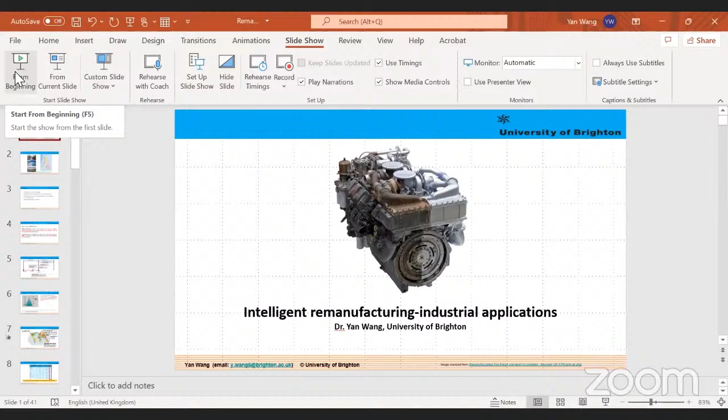Yes, it's visible. Excellent. So today's topic, we'll talk about intelligent remanufacturing, which is focused on industrial applications.

We also have history, a lot of art shops here. So it's a very popular area in Brighton for English people to come to visit. It is a tourist attraction area as well. So I do hope you could come to visit me in Brighton, not only for remanufacturing, but also for the culture and the history as well.

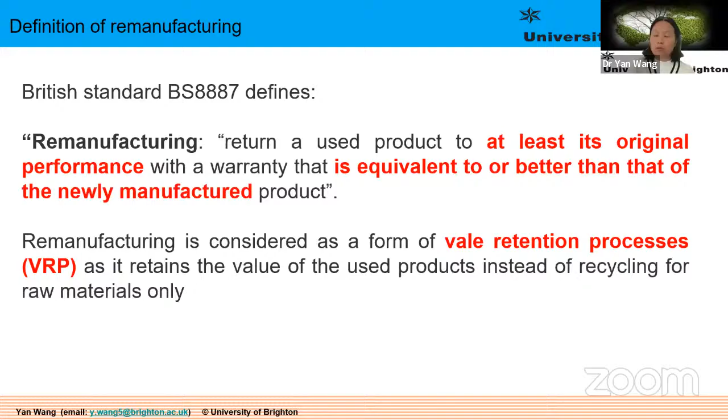There is a lot of confusion between remanufacturing and other similar terms, for example refurbishment, reuse, or repair. I would like to use this diagram to show the difference.

The first one is repair. Normally repair is within the first life and it doesn't change the ownership. Remanufacturing would expect the same amount of life compared to the previous life. But refurbishment is a bit lower form of remanufacturing—it does return an end-of-life product back to life again, but doesn't guarantee the same amount of service life. Direct reuse is just like selling a product on eBay—somebody else wants to use it, or you do some simple cleaning and reuse it again.

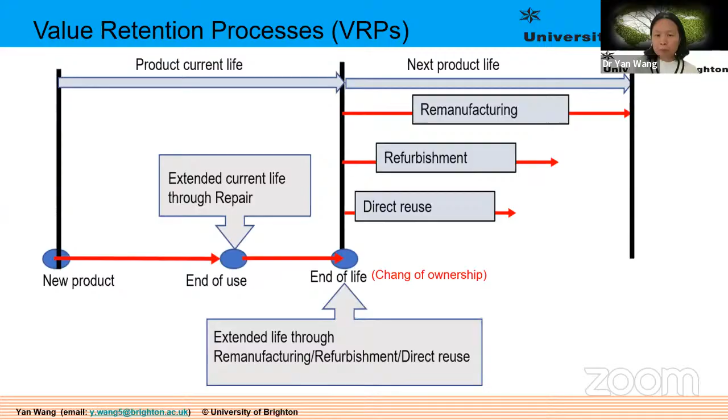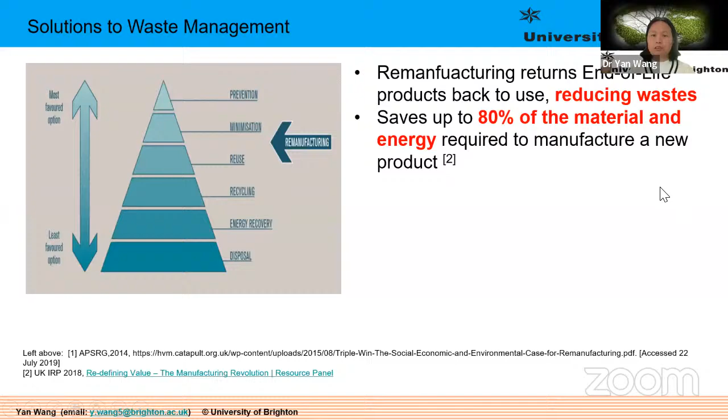So it's not the same level as remanufacturing. Remanufacturing is the highest level for reuse. If you look at the waste hierarchy, remanufacturing is at a very high level compared to reuse, and recycling is definitely much higher level compared to energy recovery. It also reduces waste, and you can save up to 80% of materials and energy compared to making a new product.

If you look globally, the largest market for remanufacturing is in the US. The second is the EU, and within the EU, Germany has the most remanufacturing, followed by the UK, France, and Italy. Outside the US or EU, the next area is Asia. Asia is one of the biggest and fastest growing areas, with China being a major player in that region.

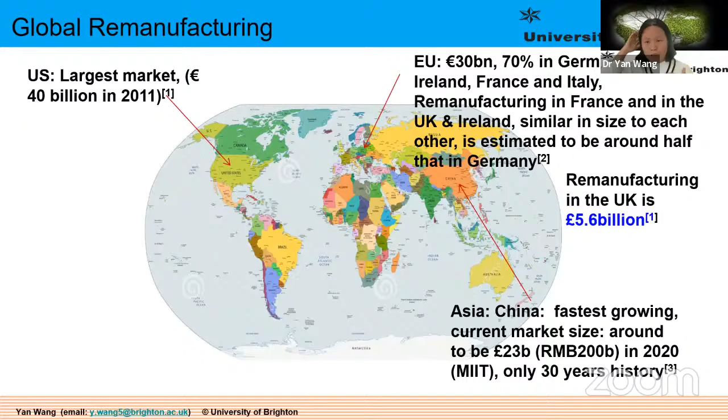If you look at the sector distribution, the biggest area is really aerospace, followed by automotive, then heavy-duty off-road machinery, then others such as furniture repair or industrial medical equipment. That is the distribution.

However, if you look at the intensity, defined as the ratio of remanufacturing to manufacturing, actually remanufacturing is very, very low—only 1.9% of virgin manufacturing. So there's a lot of work to be done. I'm not surprised if somebody says they've never heard of remanufacturing, because this sector is so underrepresented and not widely recognized as an existing industry. There's a lot of activity in the background, but a lot of people don't know about it.

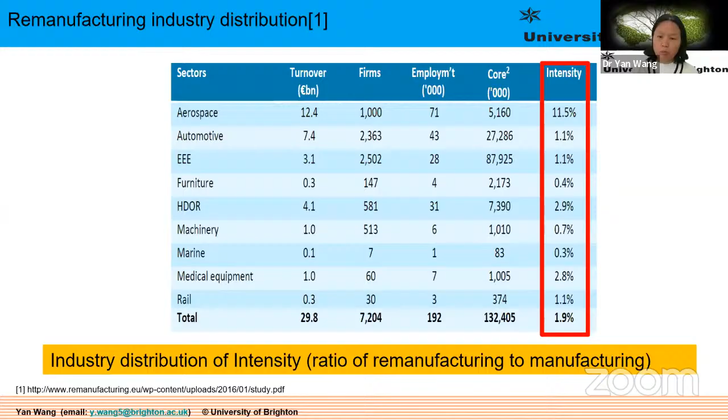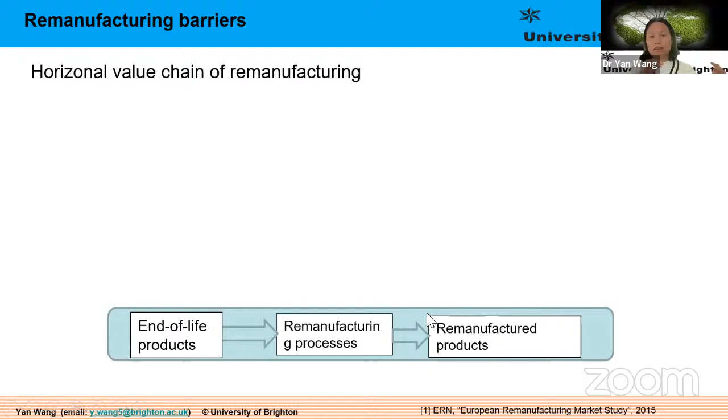Having talked about remanufacturing, I would like to talk about the challenge for remanufacturing. If you look at the remanufacturing process, you start from end of life product - that is the feedstock for remanufacturing. Then they go through the remanufacturing process: disassembly, cleaning, inspection, repair, reassembly, and then repackage. Then they deliver to the customer again and become remanufactured product.

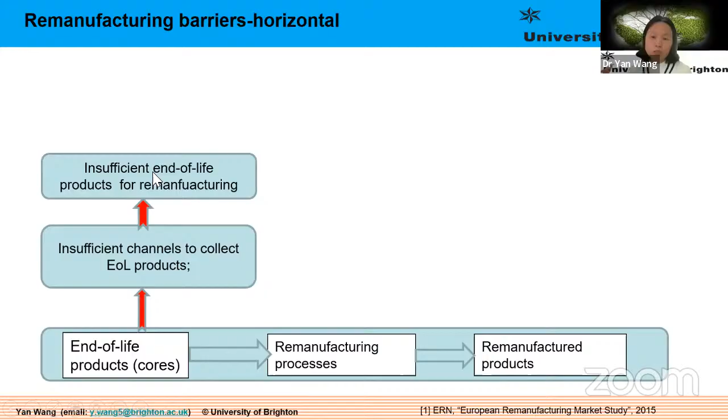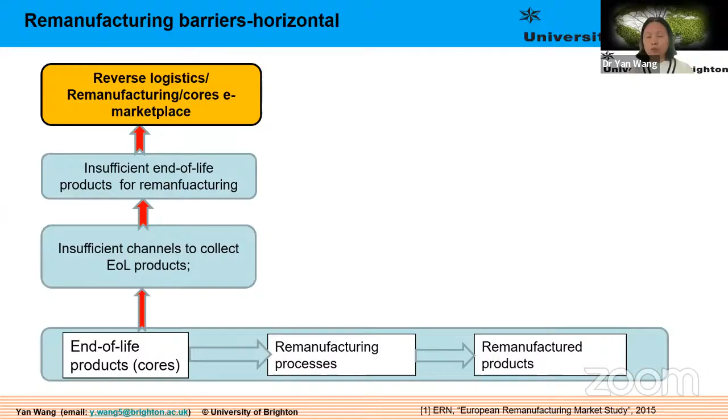If you're looking at this horizontal value chain for remanufacturing, there are a lot of potential issues. The biggest problem for remanufacturers is they don't have enough channels to collect end-of-life product. As a result, they don't have enough product to organize remanufacturing. If we could work on the research, we could work on reverse logistics or look at an e-marketplace, like Amazon for remanufacturing, to collect used products.

If you look at the remanufacturing process, the biggest issue is uncertainty, because the feedstock for remanufacturing is end-of-life product, and you don't know when a product is going to fail, and you don't know how many are going to arrive for remanufacturing. That makes it extremely difficult for the remanufacturing process, because the company has to organize resources without knowing how many products will arrive and how to organize resources to deal with this.

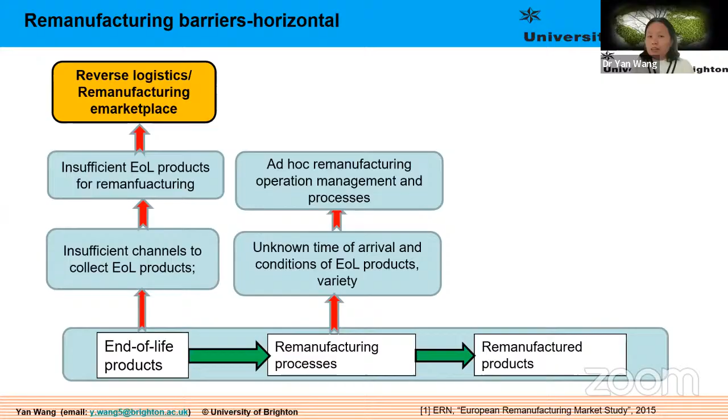As a result, remanufacturing is really ad hoc - they can't plan at once. So you cannot have the same amount of efficiency as manufacturing. The remanufacturing efficiency is only one-third of that compared to manufacturing. Therefore, there is a lot of research needed to make the remanufacturing process agile and efficient.

Looking at when the product is remanufactured, there are also a lot of issues. For example, a lot of people don't know there is remanufactured product - they don't understand remanufactured product exists, and they feel remanufactured product is kind of second-hand, so they don't trust the quality of remanufactured product.

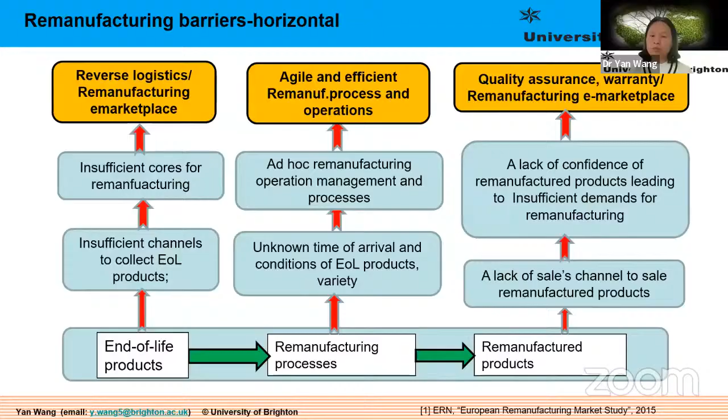They also have no confidence in remanufactured product, and that tells us there is a need for research to get quality assurance, to look at the warranty, as well as accreditation. When somebody claims my product is as good as new, how do you know he does the job? There will need to be quality assurance as well as an accreditation process for the remanufactured product. Another problem is there's a lack of sales channel for remanufactured product - we need an e-marketplace for remanufactured product, similar to Amazon for new products.

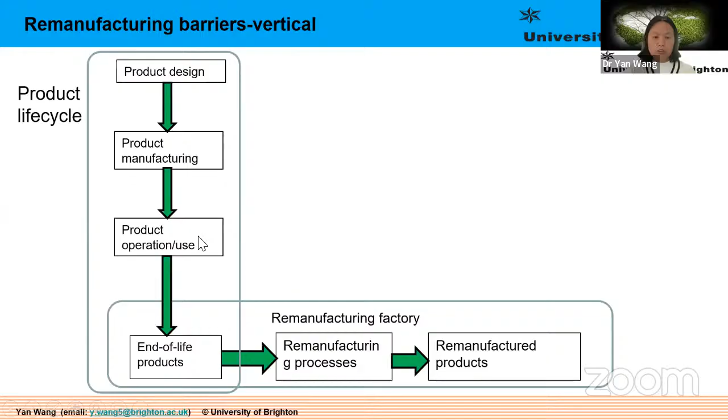If I want to look vertically at the product life cycle, remanufacturing starts at the end of the first life, and this is the starting point of the second life. So the first life will definitely affect how the product is processed and used in the second life. Looking at the first life, a product experiences design, manufacturing, operation, use, and then end of life. For each of these stages, there are their own problems.

The big challenge is that products are not designed for remanufacturing. They are designed to reduce cost, designed for mass production, but not designed for remanufacturing. As a result, the product is very difficult to disassemble - if you want to disassemble it, most of the time you just have to break it or destroy it. So they're not designed to be remanufactured. A typical example is probably Apple phones or Apple computers.

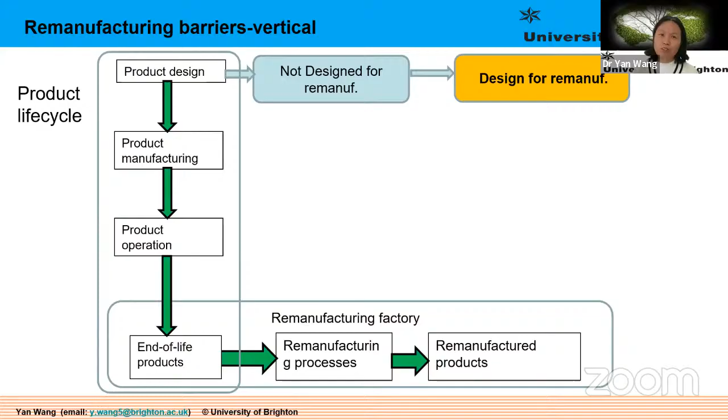The next issue is that when you're doing manufacturing and operation, the data is not shared with remanufacturing, because the business model for remanufacturing is often subcontracted - they're not integrated into the product life cycle. So the OEM has all the information for the design and manufacturing, and the user has information about how it's being used, but this information is not passed to the remanufacturer. So the remanufacturer has no idea what has been done to this product in its previous life. Therefore, they cannot make an informed decision about what they can do in the process, or whether a product is reusable for a second life.

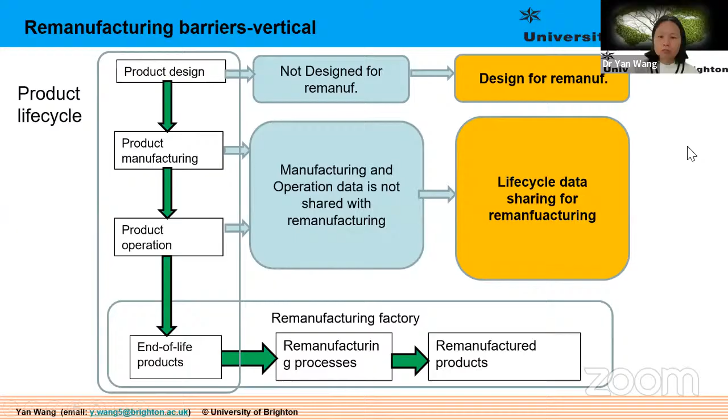So that is a very big issue for them. In addition to the horizontal supply chain level, production level, or the vertical level in the life cycle, there are a lot of non-technical issues.

For example, the legislation. In the EU, a lot of end-of-life products are treated as waste. If they're treated as waste, they have a lot of limitations on what you can do for a product.

The second one is about trade. There are a lot of limitations on what you can do for the end-of-life product. If you want to import, export, or remanufacture it, you might have to import the end-of-life product, remanufacture it, and then export it again to be used. But a lot of countries have limits on the trade of remanufactured or end-of-life products because they're treated as waste.

They also have a problem with standardization and accreditation. As I'm a committee member for the standard, we are developing some standards for the BSI, but the standards are very, very limited.

There's also a lack of awareness and trust, because, as you said, you only knew about remanufacturing 6 months ago, and a lot of people probably don't know about remanufacturing until now. So there's confusion between remanufacturing and refurbishment, which affects awareness and trust of remanufactured products, because people think it's the same as refurbishment and don't trust the quality of remanufacturing.

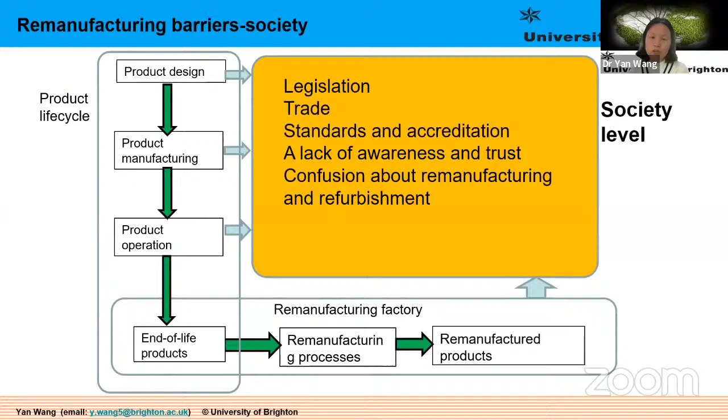So this is just giving you a summary of the problems with remanufacturing. We also conducted a national survey of remanufacturers to get first-hand information on what exactly the problem is for them. This is a survey we did last year with some other partners about the barriers facing remanufacturers, and it was participated in by 20 plus companies.

And what they told me, coming directly from companies, is that the biggest problem for them is user behavior or perception of remanufacturing as second hand.

The second big issue is technical data from the OEM, because the original manufacturer doesn't share the data on how the product is made, what materials are used, and what manufacturing specifications they have for the first life. This information is not passed on to the remanufacturer, so they have to do it from scratch.

Then the next one is legislation and certification, which is what we mentioned about remanufacturing, where the end-of-life product is treated as waste rather than an asset available to be used again.

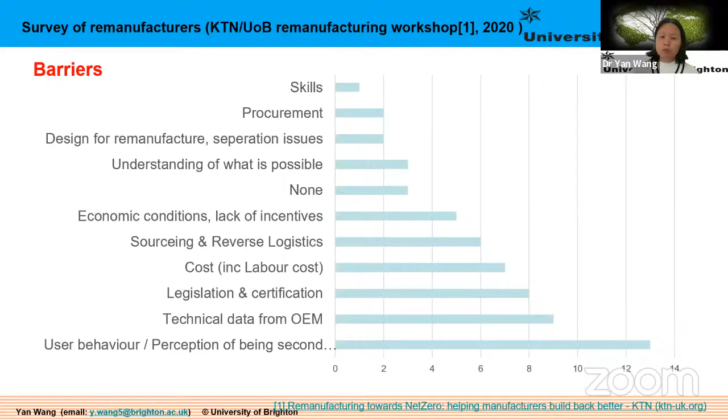If you look at all these challenges, then okay, why are people still doing it? There are also a lot of opportunities for remanufacturing, the drivers for remanufacturing. So again, we did a survey.

We surveyed about 25 remanufacturers, asking them what the biggest driver they would consider for remanufacturing is, and the majority of them said sustainability, material efficiency, and circularity. This is the biggest driver, especially in the UK.

Net zero is part of the legislation, and companies have to do much more now compared to before for net zero and reducing carbon emissions. Remanufacturing offers an alternative for them to reduce carbon emissions, so that attracts a lot of attention at this moment.

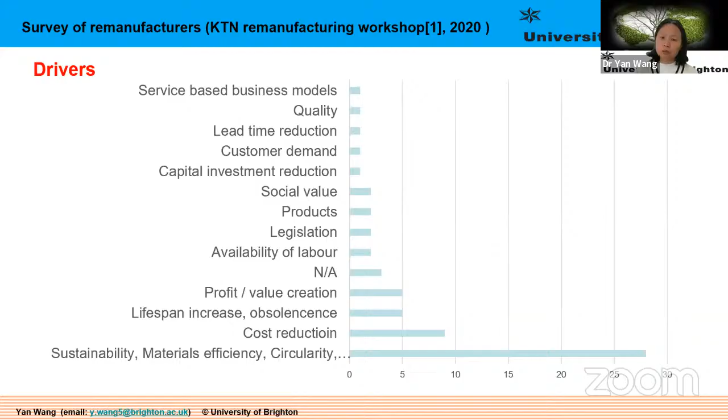And the EU legislation, the right to repair, has forced OEMs and designers to think about what products are going to be and make them repairable at end of life, and that will help with this design for VRP.

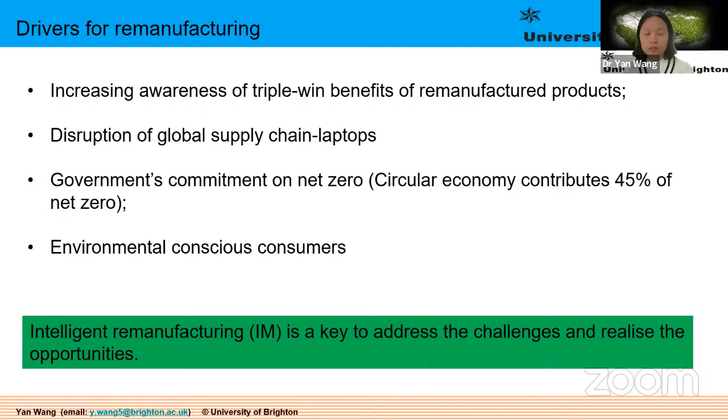So in all of this, to address the challenges and deliver the benefits of remanufacturing, and realize its opportunities, intelligent remanufacturing is key to addressing these challenges. So now, we've talked about the problems with remanufacturing, we've explained the opportunities, but the next question is: what is the solution? What do you mean by intelligent remanufacturing?

I think you're very familiar with the pillars of intelligent manufacturing, but to me, I would like to say the focus of intelligent remanufacturing should be on three areas for remanufacturing.

First is life cycle data integration. We need to develop a mechanism, business model, or method to be able to access data from the first life for remanufacturing, for example design data, manufacturing data, operation use data, and maintenance data. They need to be passed on, there should be some mechanism to pass this on to the remanufacturer for them to use. Based on this data, the remanufacturer can decide how they're going to do the remanufacturing and whether or not an end-of-life product is worth remanufacturing.

Also, you're probably very familiar with predictive maintenance, they should have the same level of work for predictive remanufacturing, so we can know when a product should be remanufactured rather than only looking at when a product should be maintained. That's a key area intelligent remanufacturing should be looking at.

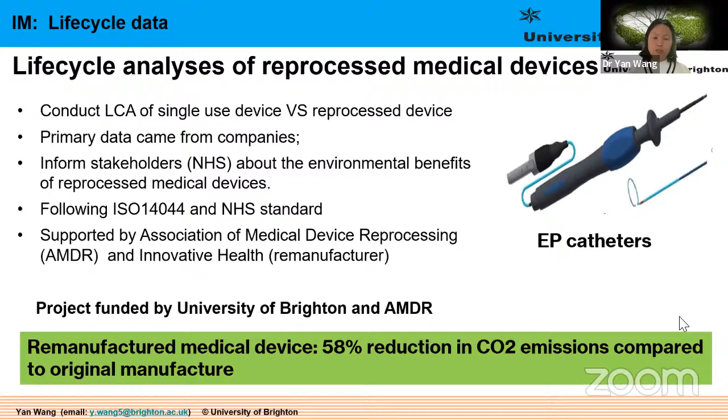So after we talk about life cycle analysis, we also worked on the intelligent factory, and for this case study, we're using the rolling stock, talking about flexible restoration, how we repair end of life defective product for rolling stock components.

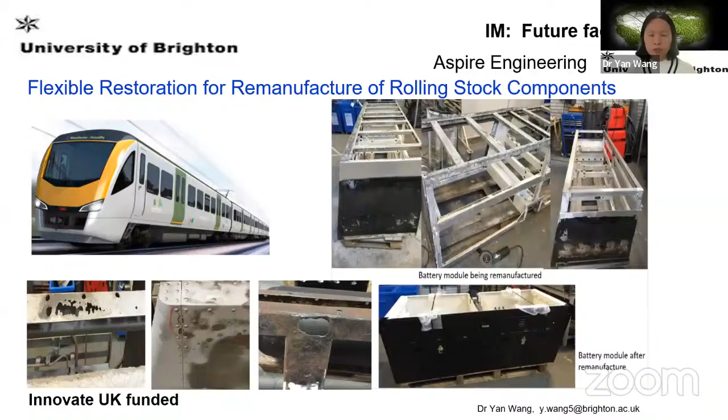As you can see, components like that are retired at the overhaul process. Each of them is individual, so they have to be repaired individually. At this moment, this has been done manually. We are looking at whether we can do something more flexible, adaptive, and then make them automated.

So what we did is we developed a hybrid process, adaptive robotics remanufacturing. We take an end-of-life defective product and use 3D scanning to reconstruct the digital model of the product. We develop an algorithm to compare this defective component with the original component, to calculate where the defect is. Based on the defect, we create the tool paths to repair the material deposit, the missing materials, and then we do the subsequent machining to machine them back so you get a smooth surface. So that is the overall framework.

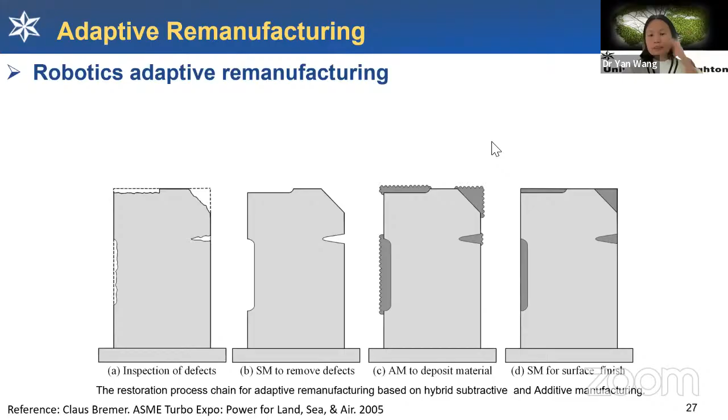The real research question, the very big challenge, is if each component is individual, how do I identify what kind of failure it is? It could be failed by corrosion, it could be failed by crack, it could be failed by fracture, for example. How do I know which failure it is? I need to identify it accurately and quickly for remanufacturing.

Second, how could I generate a repair strategy for a robot to do the repair according to the identified failure feature? So which repair parameters should I use, what is the tool path, the movement of the cutter, the welding deposition for the repair of the defect area, and what is the tool path for the subsequent machining, because I want them to be automated. So what can I do with that?

So to do that, the first step is to identify the failure. As we said, what we did is use 3D scanning to scan the defective model, and compare it with the nominal model using an algorithm we developed. We cut them into layers and compare each layer to find the difference between them, which allows us to extract the point cloud of the damaged regions. That is extremely useful for us, because with this point cloud of the damaged region, we can calculate where the failure location is and what the failure mode is, by looking at the geometry.

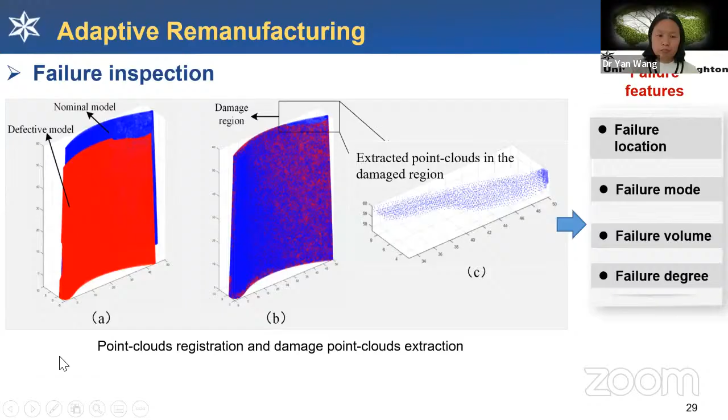We also assess the surface and what kind of failure degree it is - whether it's serious enough that it should be scrapped, or whether it's worth repairing, or maybe not worth repairing at all. So that allows us to make decisions and do things useful for decision making.

So the next one is, we have developed an algorithm. This algorithm automatically identifies the area that is missing from the component, shown in red color. Once you've identified the area that needs repair, then we can look at how to repair it.

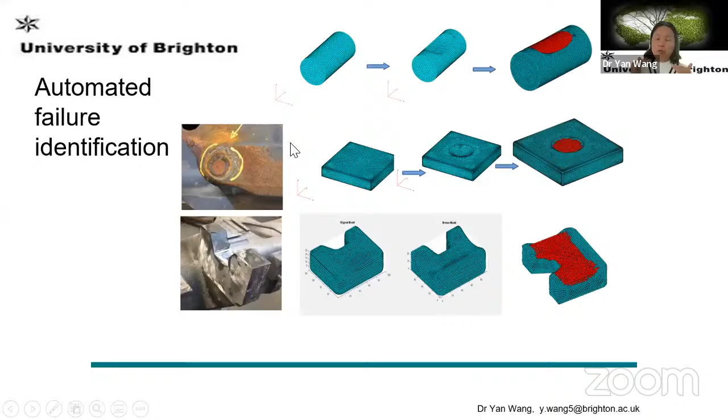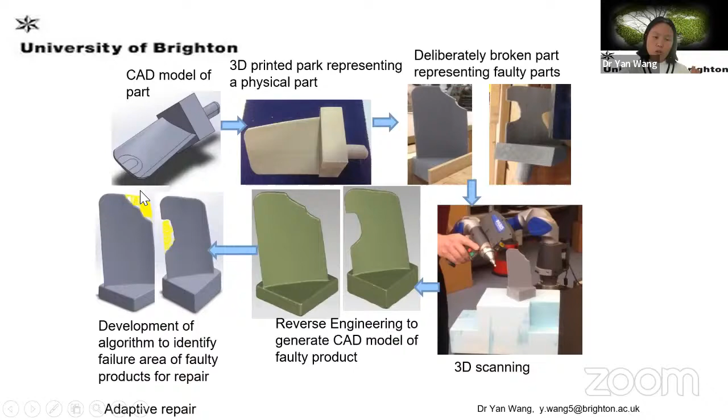This is also an example of how we could automatically identify the parts that need repair. As you can see here, we deliberately break down this turbine blade, then use a 3D scanner to scan it, reconstruct the CAD model, and then our algorithm automatically identifies the area that needs to be repaired.

We've been convinced that we can identify the failure automatically, but the next question is, so what? What are we going to do with this information? If we know which part needs repair and where the failure is, we need to decide what kind of repair route, steps, and parameters to use.

And that is very much experience-based. So instead, we would like to say, okay, how can we reuse knowledge that has been used before, and then regenerate that knowledge for the new component repair.

So we've developed tools that automatically, once we have incoming parts that need repair, look at or generate a database recording all the previous decision making. Then we search for what's been done before, and compare whether we can use the same route, same steps, the same parameters for this new component that needs repair.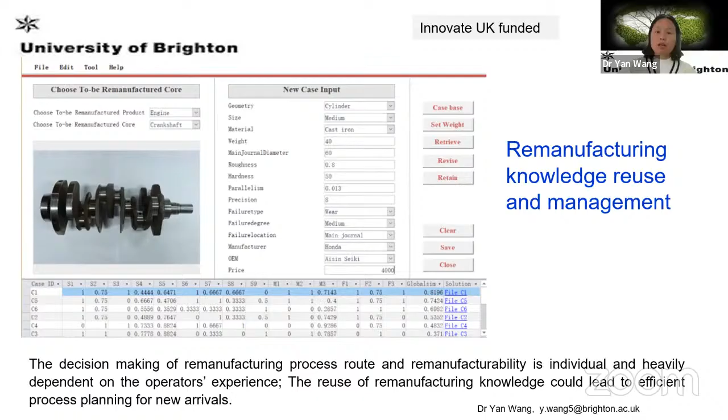And then based on that, we can quickly decide what the cutting and repair parameters are. Then we can look at what we can do with the toolpaths.

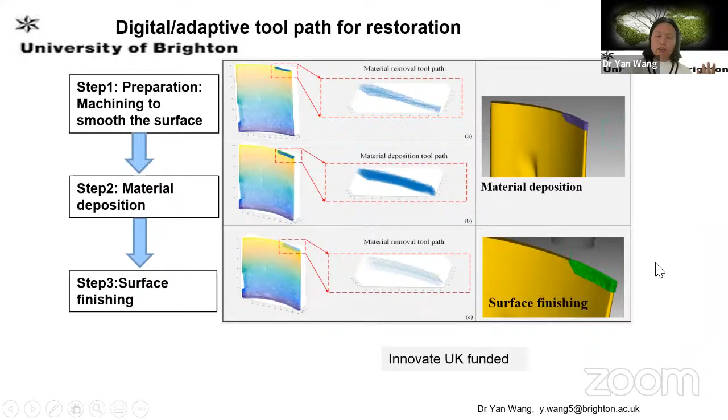And we've also used the same kind of methodology, and rather than only for rolling stock, we also use the same methodology in different sectors.

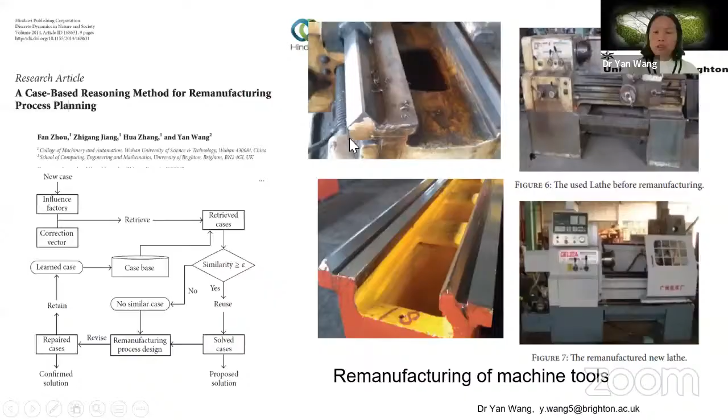For example, we use machine tools. We use the same kind of decision maker. We record what's been done before for a similar component in terms of cutting, repair parameters, and repair severity degrees, as well as the route of how they've been repaired. And we use the same methodology for machine tools as well.

We also look at, once we have the software done, we know the algorithm to detect the defect, and use that algorithm to identify the previous parameter that's been used. We use that for the toolpath, for how things have been repaired.

Now we look at how we could develop the hardware, the robot, to integrate the software we've developed into the repair process. We're working on the repair of the fuel tank as a case study. This is an ongoing PhD student who's been working on that one.

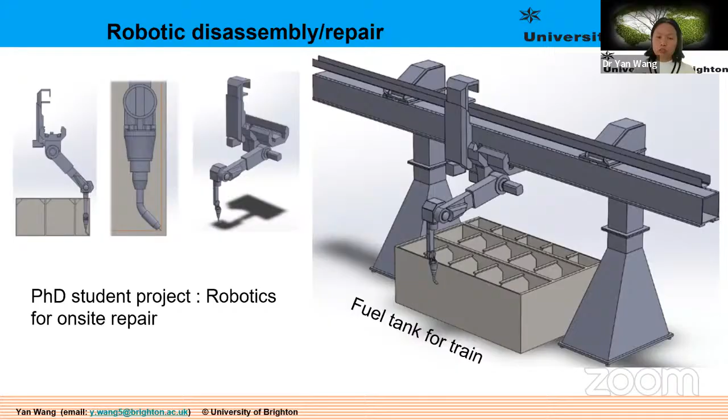In addition to the repair, and in addition to life cycle analysis, we're also working on disassembly for reuse. We've got end-of-life laptops, and we want to see how long it takes to repair them, and where the problem is for the repair.

Apparently the OEM doesn't really take this into consideration when they design the laptop, for example. As you can see, there are so many different sizes, so many different screws and nuts for the laptop, and that makes disassembly extremely difficult and inefficient, and makes the cost of remanufacturing very high, and makes it probably not worth remanufacturing.

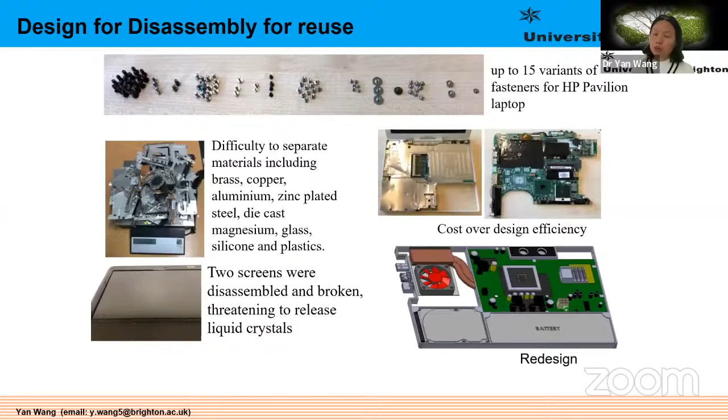In addition to that, we're also working on the e-marketplace to address the problem. There's a lack of channel for the remanufactured product to get cores, to get the end-of-life product for remanufacture. So we've worked with a company.

We developed an e-marketplace online platform similar to Amazon, and we formed a company to commercialize it. This company has been recommended as one of the 4 clean technology companies to be watched by Digital Catapult, a government organization, in 2021.

So having talked about the remanufacturing challenge, the drivers, and remanufacturing research, what is the future? I would say the future is bright, and to be honest, what we have done is just scratch the surface. There's so much more that needs to be done.

If you want to achieve the future potential of remanufacturing, remanufacturing has to be as efficient as manufacturing, and the cost has to be the same as manufacturing. Otherwise, remanufacturing won't be competitive and people won't want to use it. So it has to be as good and as efficient as manufacturing, and a lot of technology has to be invested to make that happen.

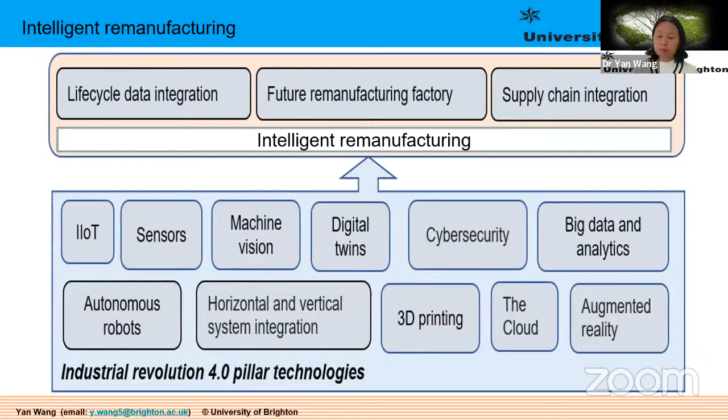So that is really the end of my lecture.

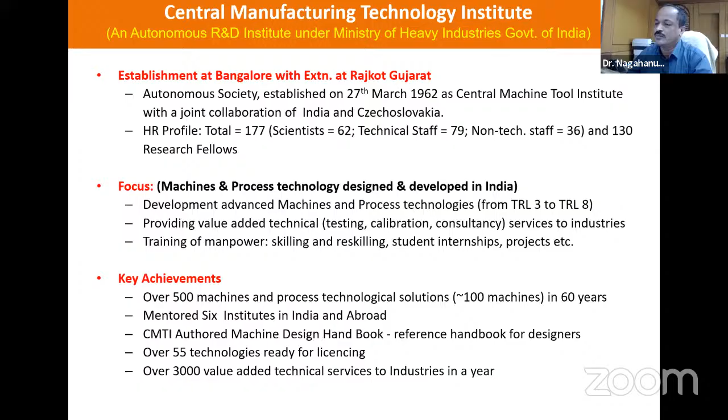We mentored six institutes, and authored a machine design handbook, which even today serves as a reference material for all mechanical designers. We have over 55 technologies now available for licensing. We also serve about 3,000 industries by providing value-added technical services.

While doing our research, we primarily focus on three aspects: developing manufacturing processes, and then manufacturing equipment and systems. The kind of activity we do is to address challenges with respect to all 4 Ps I call: product, process, people, and production. This means our activities also have 4 folds.

First, we build machines for problems faced by end users - they may come with process knowledge or may not, but we still develop the process and equipment and supply it. Second, we identify manufacturing gaps, the technology gaps with respect to machines and process technology, and then my colleagues build the machines and automation systems. Third, we also work on the manufacturing ecosystem, either on the request of industry or based on problems identified by our own scientists. This third activity is primarily providing services to industry.

Looking at the second focus domain - the first two I mentioned, machine development - we develop ultra precision machine tools and special purpose machines. Because of time constraints, I won't go into details, but these pictures are not prototypes; these are all machines installed in user industries. We build machines capable of creating micro nano scale features with an accuracy level of at least 6 decimal places. We also build special purpose machines, from tabletop machines to large machines, to solve stakeholders' or end users' requirements and fulfill their needs.

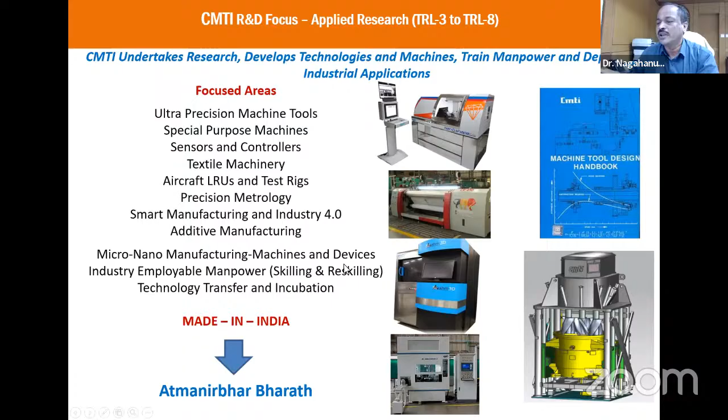Technology transfer and incubation is the essential activity where we focused. Whatever we do, as I already mentioned, we look at machines and technologies developed in India, that is Made in India. We're proud that whatever system solutions we provide to our industry, it is at least new to India. So we are already into the Atmanirbhar Bharat vision of the government.

These are the services. We test machine tools and its aggregates. We offer measurement and calibration services. I will come back to the third one, the aerospace qualification test, material testing, nano manufacturing. We are also into re-engineering or remanufacturing of high value components.

Our focus is on several electromechanical systems and equipment which were installed by importing, but in many cases they don't have the kind of traceability or spare parts. Those equipments still have an opportunity to recondition. So we work on those things, and 3D printing primarily helps us.

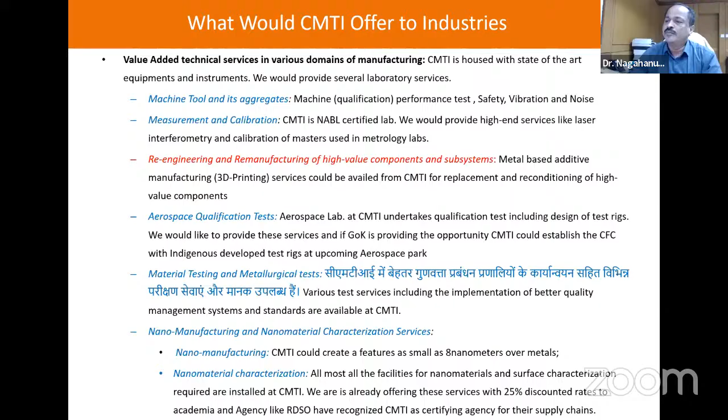We also offer training. As I said, we don't have a degree program, but otherwise about 55 training programs, 25 corporate training programs, active learning workshops, a finishing school up to 6 months for engineers, summer internships, and some online courses for working professionals.

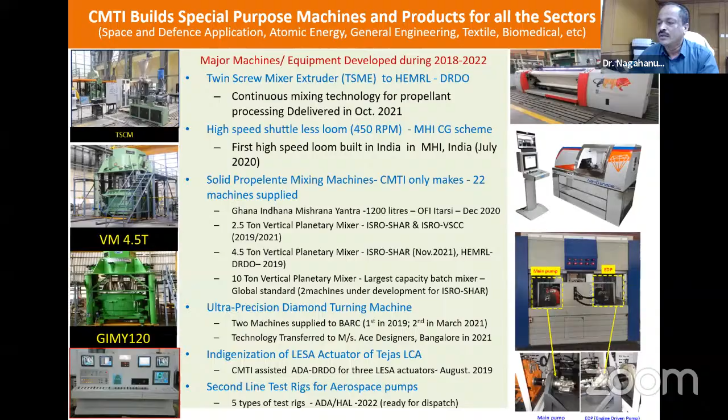Annually we build about 8 to 10 machines. These are just populated, I will not go through details. If you look at 18 to 22, the last 4 years, we built about 26 machines, and all these 26 machines were built in India for the first time. I think that is our strength.

So I'm gradually entering the subject, that is about CMTI. Just to introduce, before getting to remanufacturing, for better understanding, what is product innovation? We know that product innovation essentially has 4 distinguished stages. It starts with research, then research is translated into technology, and then it requires training to the person, people, the user, the manager, or the investor.

You have to train them. Then you deploy, and during the application itself, there are other issues like maintenance, supply chain, how to increase productivity, all those aspects. Altogether I call it the 4 Ps. The challenges are related to product design, process design, people, and production. That is what I think CMTI has, all the components.

And this is the golden rule. Any new product development or new product innovation, one has to go through this process. So naturally, it is also known that the primary driver is, yes, you know how to do things with your hands. Definitely you will be skillful. That is what we believe.

And you are more free and independent as an individual. You can depend on yourself and your community. You are well prepared, you can stand at the technological crash and revolution. I think many of our industries have learned this during the pandemic, because their entire company fully depended on some industry or some suppliers globally.

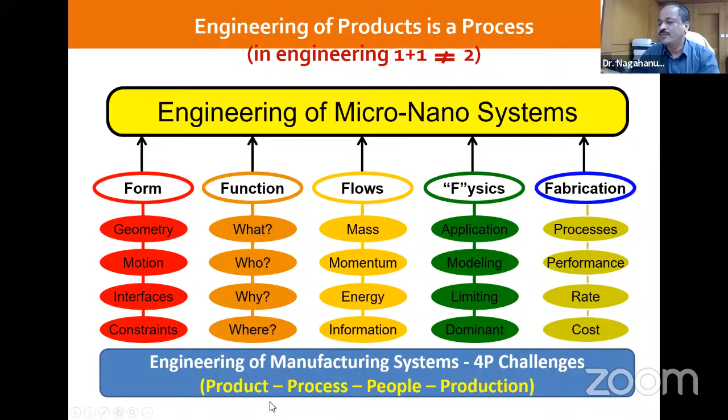Now, what is remanufacturing? By this time, this community already knows, because several researchers must have already talked about it. But in simple terms, what I understood is this: the conventional economy is primarily focused on the manufacturing value chain. That means there are resources, you use the available resources to make a product. That product can be utilized to meet your requirements, either to add value or to impart comfort to the citizen. I think whatever we do, at the end of the day, it's about citizen comfort.

And then, all products have a limited or defined life. Once it is done, you dispose of it. So what are the challenges with this? I try to list - of course it is debatable - but it is what I could gather to the best of my understanding in the manufacturing value chain. Resources are always limited because each country, each system has constraints - somebody doesn't have money, somebody doesn't have material, somebody doesn't have capital. So resources are always limited.

And users are continuously increasing. You can take any component - naturally, from the time of introduction to maturity, it is definitely because of the user. That is what the business house also expects. And manufacturing processes are becoming expensive, and the cost of ownership is also increasing.

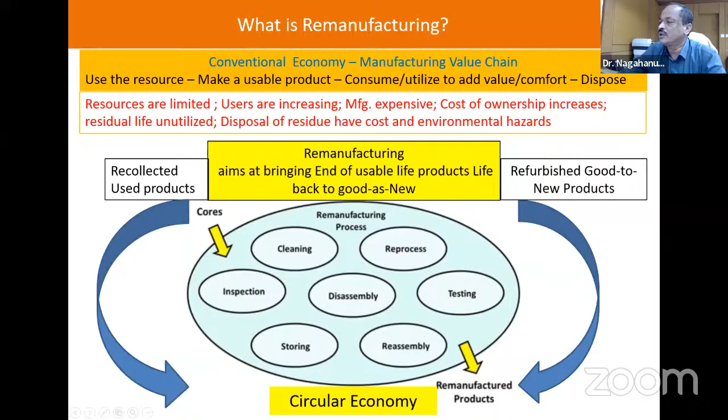And then you can call it smart enterprises, smart factory, or people call it IIoT, IoT, whatever it is. But the overall idea is that. And this varies from company to company, shop floor to shop floor within the company, and even machine to machine.

So there are several technology pillars getting evolved. Some people call it 9 technology pillars, some 14 technology pillars, and so on. But at the end of the day, whatever technology you develop that enables these four steps, you can term it an Industry 4.0 enabled technology.

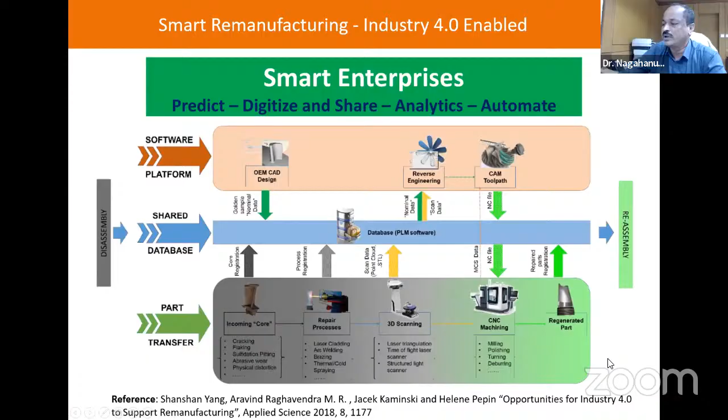Now I will talk about some of the tools my colleagues developed at CMTI. If you ask a hardcore technical question, maybe I will not be able to disclose details because the work is done by my colleagues, but we will be able to respond to you through my concerned scientist. I will request them to respond to whatever can be shared.

This is about the scanner—this is for capturing reverse engineering and also for measurement. We have developed two scanners. The one on the left side is still not made into a product.

This is basically the fringe projection scanner, which allows you to capture features as small as about 10 microns, with depth of penetration up to 1:100.

We also have a handheld scanner, kind of like videography. You can carry it wherever you want and then scan. This will allow you to capture features as small as about 30 microns.

All the solutions, starting from the hardware device—except the camera—nothing was bought. The hardware device, the software for capturing, registration, and generating a toolpath, is done by my colleagues in the Vision group.

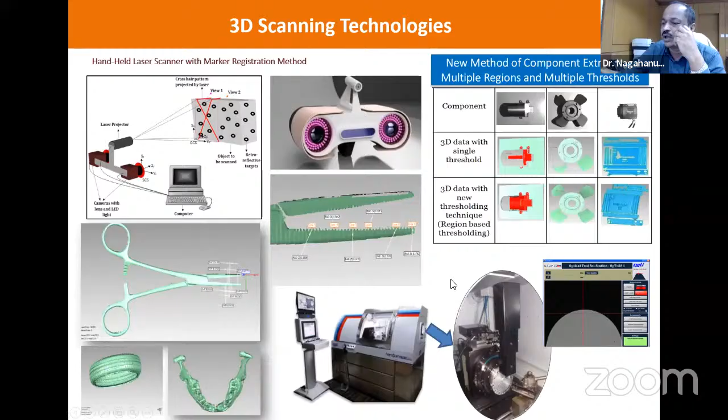This easily facilitates remanufacturing. If a component is worn out or damaged, you can always predict and recondition it. That is the input data you can generate with this solution, which we did in our institute. We also provide a service to industries on reconditioning.

This is one example developed for Cummins. This is a turbocharger. Our additive manufacturing group reconditioned it because this component they were importing, but the system they didn't want to replace, so they came to us through DED, DMD—that is the direct metal deposition process. My colleagues reconditioned this, and the broken pieces were like this.

So finally, through deposition we joined them—that's a bimetal, right? I think that is one clear example.

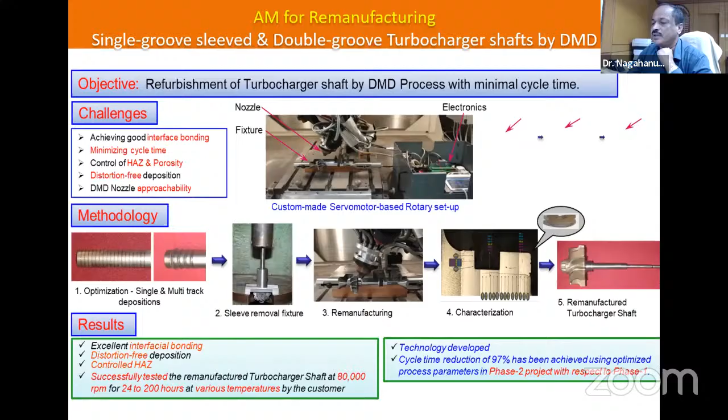Of course, there are a lot of challenges. You need to study both the metallurgical aspects and the process aspects that need to be understood. It's not like you just have an additive manufacturing machine and can use it—building a product from powder or wire as a starting material is easy because mostly these machines have a standard protocol.

But when you are looking at remanufacturing, a lot of process understanding is required, and after doing that, qualification too—because these are aerospace components, and for reconditioning, testing and qualification is another challenge. You can't take it for granted. But my colleagues have done it successfully.

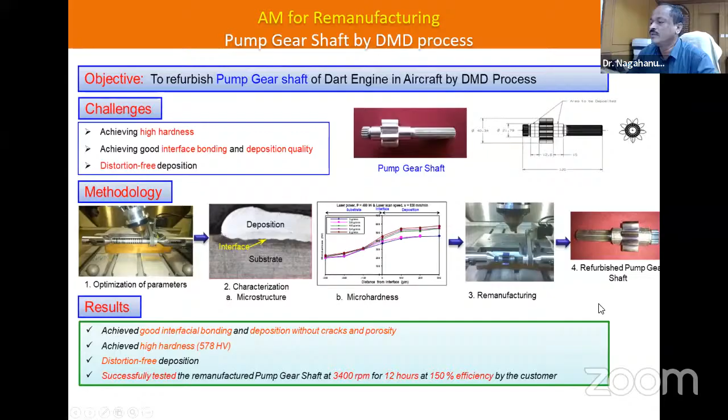We supplied to HAL. Then, as I already mentioned, this is IoT, or industry, smart manufacturing and all. The whole purpose, as I already told you, is to understand what you are doing based on the data, then share the data, do analytics to predict action points, and use those action points to solve your problem so that your company will become smart.

A smart company means one has to be innovative, responsive, cost effective, and first to market. That is the competitive advantage in the market.

I'll leave it to you whether it is a manufacturing revolution or evolution. But what are the challenges right now? Industry 4.0, in the Indian context, is still not fully implemented—it has not reached MSMEs. The major challenge is that the definition itself is wrong, not understood.

There is no common language, because when you look at manufacturing industries, even two companies situated in the same area, adjacent to each other, have different languages. And manufacturing data is heterogeneous—for example, if you look at a Siemens 840 controller, you can capture about 48 data points, but what you will do with that data, nobody knows. I think that is the present status now.

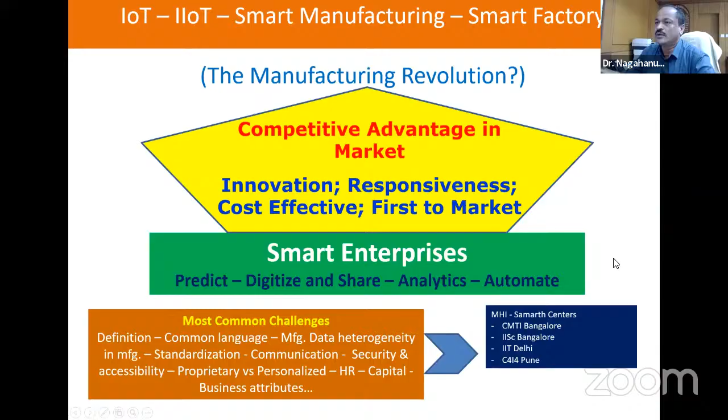This is a private group, fundamentally the Kirloskar group.

You all know what IIoT integration means. There are a lot of things to be done. Everything was already there, it's not a new technology, but now there's augmentation, with several technologies evolving parallelly or serially. We are trying to use that. Whatever we do in the manufacturing value chain, we are connecting through IT, thanks to IT people. Otherwise, it was already there.

For example, if there's a problem in the turning operation, the operator used to call the supervisor or engineer sitting in the AC room. Now that's not required. The system generates alerts, and it's not even necessary for the operator to know, because the alert goes directly to the mobile of the concerned person. That's the kind of automation that has happened, particularly with respect to communication, in the so-called smart factory.

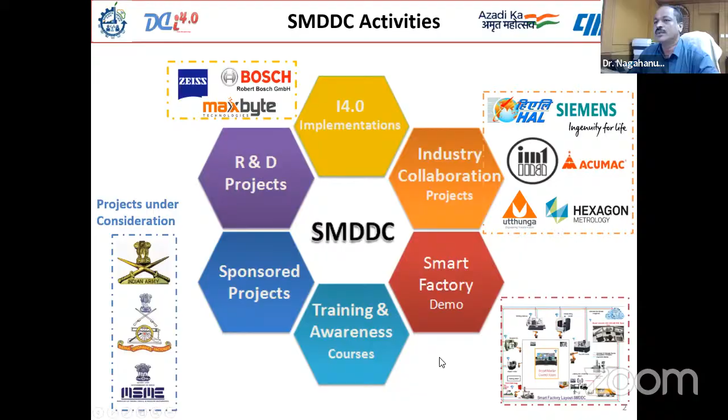Look at this, this is a machine which we call a smart machine. It is integrated with 8 sensor net kind of modules. In true sense, it is a smart machine. It all gets compensated for increase in temperature or any vibration. Not only giving an alert, it also gets compensated, and without the notice of an operator, the program itself gets compensated to ensure the desired quality.

We installed 2 machines, a little compromised version of this machine, because this machine is still our baby. Otherwise, 2 machines we installed at BARC, and now the technology is transferred to ACE Designer. If you are visiting IMTEX next January, you will see the diamond turning machine developed by ACE Designer based on CMTI technology.

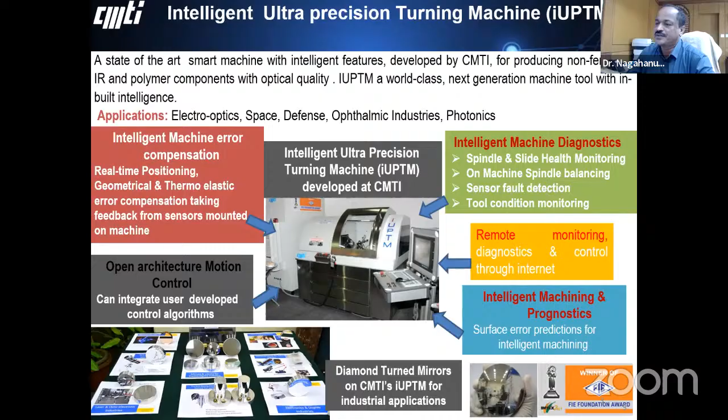This is some of the aspects we are converting, how to convert a legacy machine into a smart machine. There are 30-year-old machines, like this horizontal boring machine, a CNC machine, which CMTI purchased about 30 years ago. Now this machine has been converted into a smart machine to measure some of these aspects.

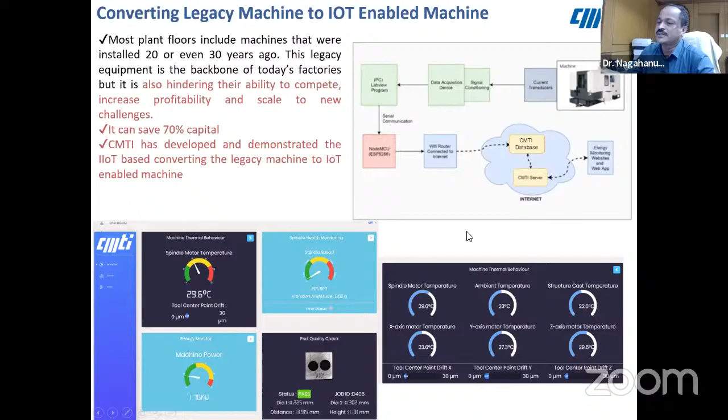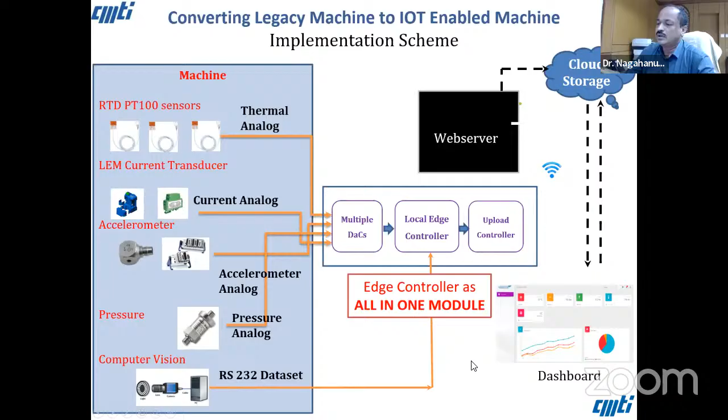Then there are little details. When we are doing this, we not only integrate sensors and capture the data, we are also developing edge controllers. That means we try to have as much indigenized solutions as possible.

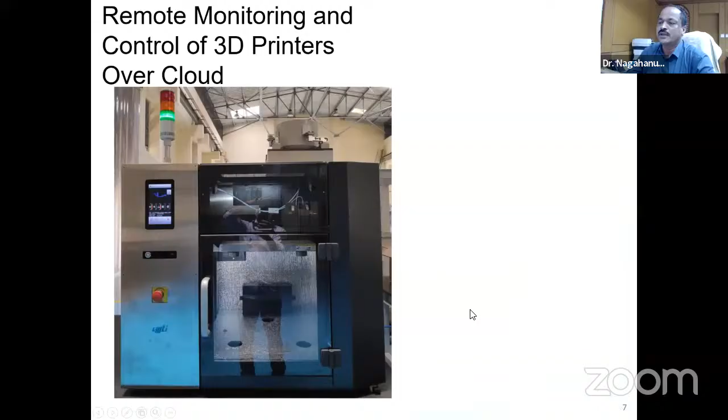This is, for example, for energy monitoring. This is a small device. If you have a machine, it will talk to your machine controller and map the energy consumption, and you can look at the energy consumption, the peak loads, the demand loads, and many other aspects.

We've also developed some gateways because when you are working with conventional, age-old machines, it is very difficult to get access to their standard controller since the old controllers don't have appropriate interfaces. So for that, we made some gateways and integrate them to try to reach the conventional controllers used in CNC machines, or sometimes we also use external controllers, where existing controllers will be used as a switch in switch mode.

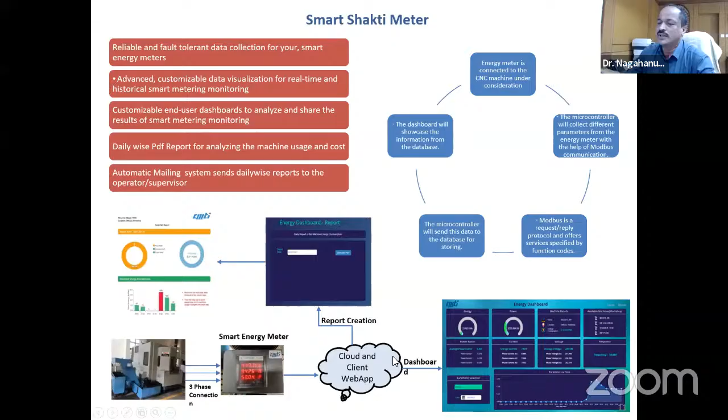And this is again the same energy meter integrated into another machine. I won't go through all the results, but these are all captured to showcase what features are possible with this. I think this is implemented in one of the MSMEs.

There's an edge computer also, these devices we also developed, because data acquisition systems or the interface to an IIoT gateway is expensive for small scale industry. We have developed one that costs just a few thousand rupees. In fact you may not believe it, but we offered some solutions to MSMEs at the cost of 5,000 rupees. I think they are quite happy because that reduced 2 manpower requirements for them.

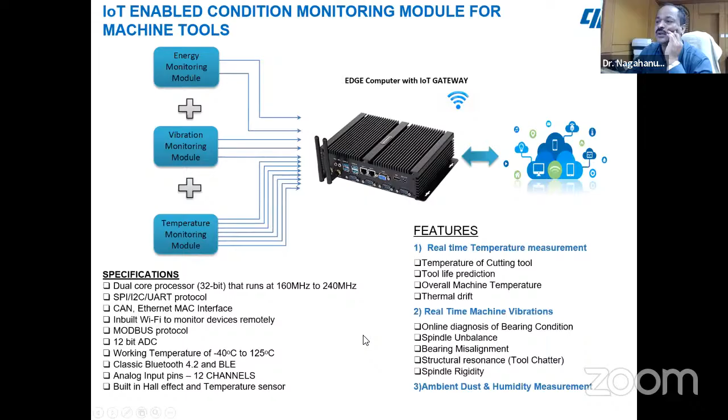Right, so I think this is a repetition, I will just skip this, like OEE.

As I said, we already talked about the OPC UA server we implemented. Through OPC UA, this is becoming the universal language now. There's an international forum centered around Germany, and some Indian companies, including our Uttunga, are partners to that. We don't want to be behind the developments happening globally, so we are already communicating through OPC UA servers for our OEE, particularly the overall equipment efficiency module.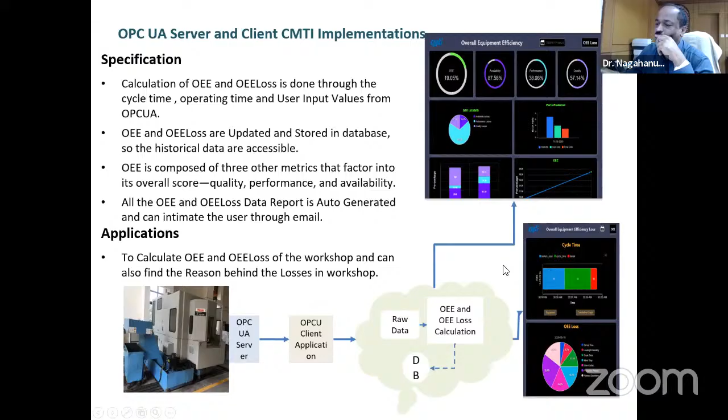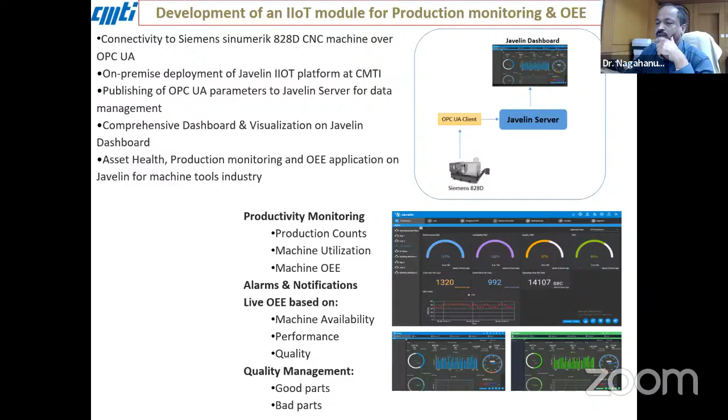That will be kind of equivalent to the OEMs which are offering those services. I think this is a little continuation of that, and some of the analytics also we'll do. There are AI-based analytical tools that we demonstrated as per our requirement, but it could be customized to individual industries.

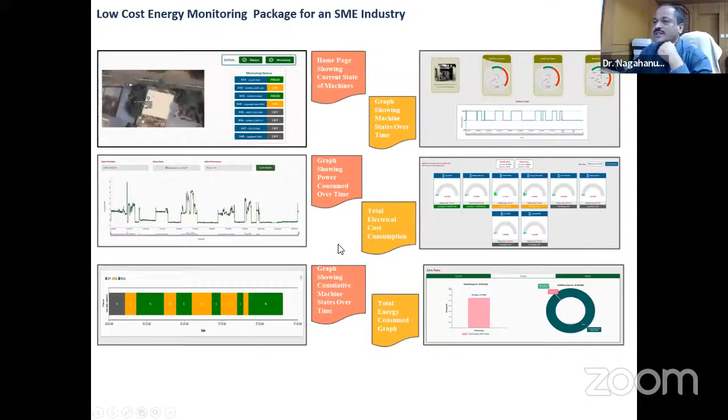And digital twin - we work with Siemens, as I mentioned. I will not give more details as we signed a confidential agreement, but the idea is CNC machines have several motors, stages, and drives. This performance has to be analyzed and mapped in situ, because these directly impact on the accuracy of the system. Here we are developing a digital twin and doing performance analysis before integrating into CNC machines.

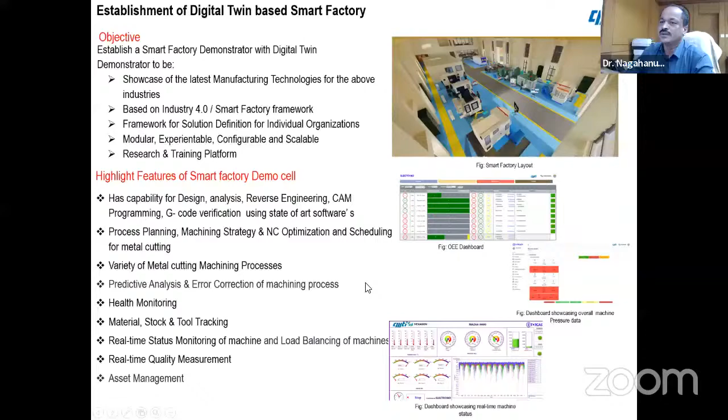So these are some of the test beds we are already physically evaluating now. And then digital twin of the factory - we are working with Hexagon. A virtual model is already there, but now we have to demonstrate it for a complete factory. It would take another 5 to 6 months to completely demonstrate this concept. Otherwise, some systems are already in place and my colleagues are working on them.

There are also some student projects we do related to IIoT and AI. During COVID, one of the students tried to develop an image-based attendance system, and IIoT capabilities were also demonstrated. It is integrated into our reception entry attendance.

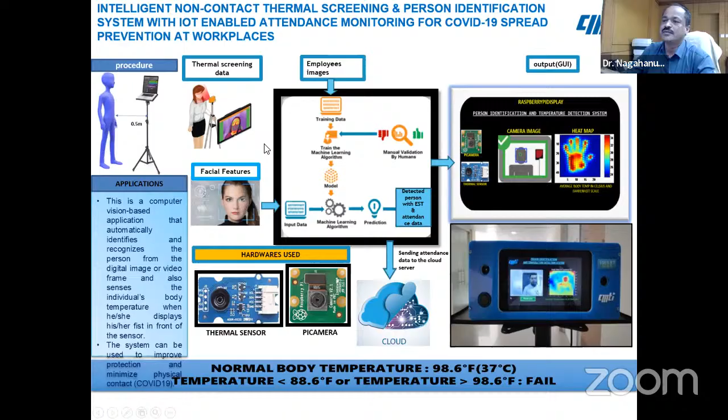This is a little advanced area, but we're still working on this. This is the digital twin, particularly the functional performance analysis of a product. It is not just a CAD model or simulation of one or two aspects, but we need to study this in depth. Of course, I can say it is still on the learning curve, but not really completed - we are working towards that.

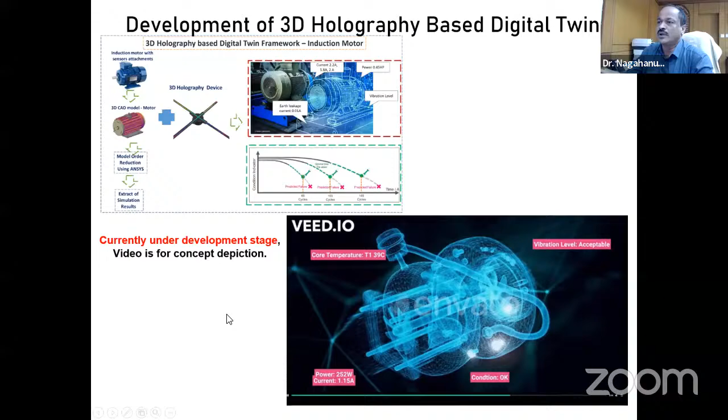Then there are some digital interfaces and VR-based interface tools we developed, and we also developed a lab, so when trainees come they can easily play around with this and acquire the required skill sets.

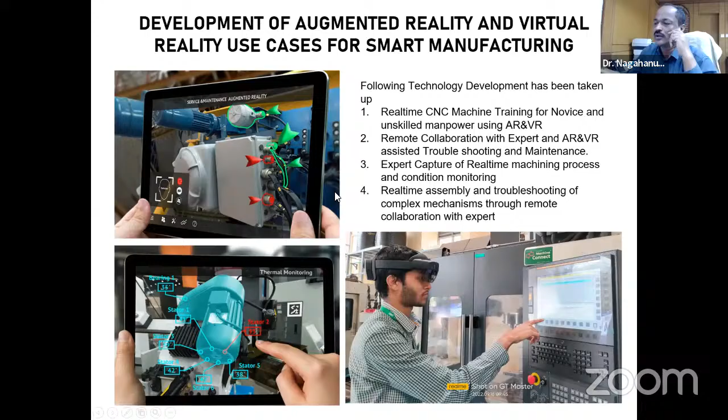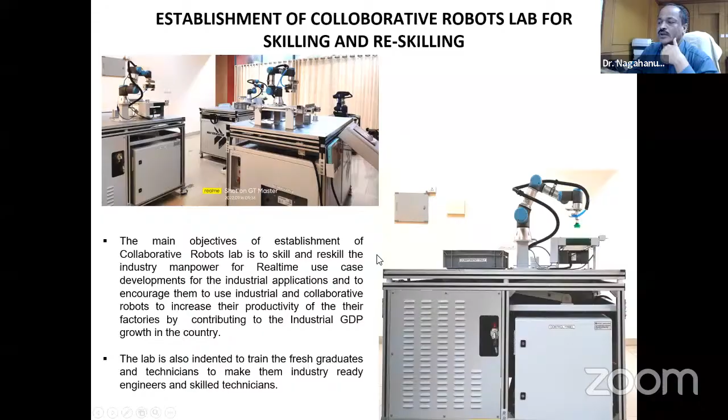And this is the inspection system, a smart inspection system, integrated into part of the factory, where cobots are all integrated. So basically we primarily work on cobots, on the interface between human and cobots. I think that is our focus area. We purchased these cobots, but we are more interested in the technology itself. That is what we did.

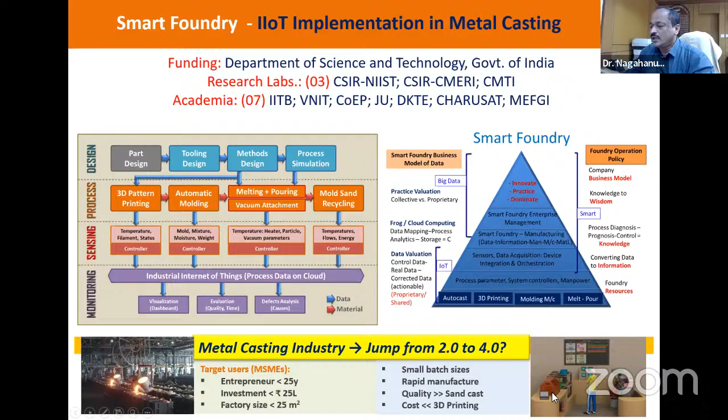Earlier we thought of individual systems, but now fortunately we have developed this. This is the first casting that came out of our individual system, built by various researchers, primarily from academic institutes. DST was kind enough to extend our project, and finally we arrived at this - the smart foundry system. The footprint of the machine is 16 feet by 8 feet, and it allows you to cast up to 1 kg.

Starting from CAD data, we use our own software to design the tooling simulation, then send the data to the 3D printing unit, which is part of the system. You print this, then make the sand mold and cast it. I think that is what we have now demonstrated.

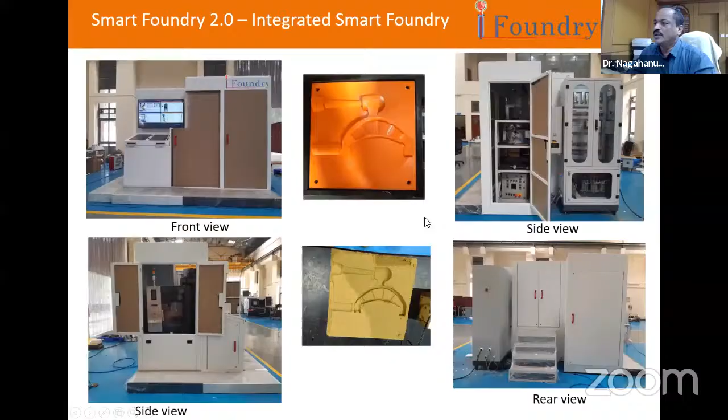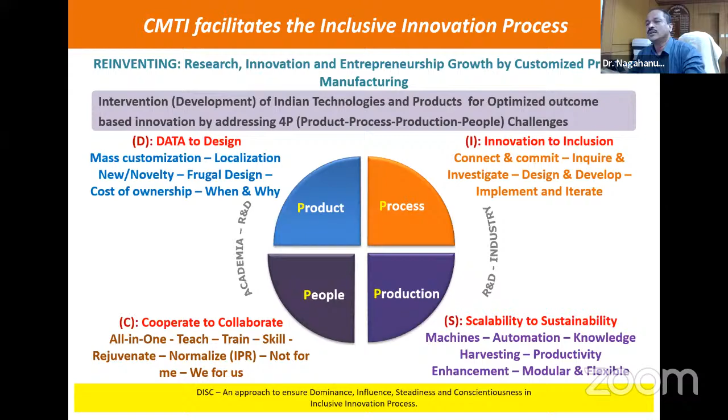We closely work with academic institutes. We have an open innovation platform called DIST. You can log in and register. There are several opportunities, the idea being to bring the problem solver and problem owner together to solve the problem. This is a web-based portal. Already 6,000 users are there, and we already got 2 solutions. Apart from finding solutions, there are several events. Almost all our CMTI and academic connectivity happens through this portal. I request both faculties and students to make use of this portal and this opportunity for internships, project work, and also to solve the problems of industries. Now 7 problems are open that we have hosted, and industry is looking for a solution.

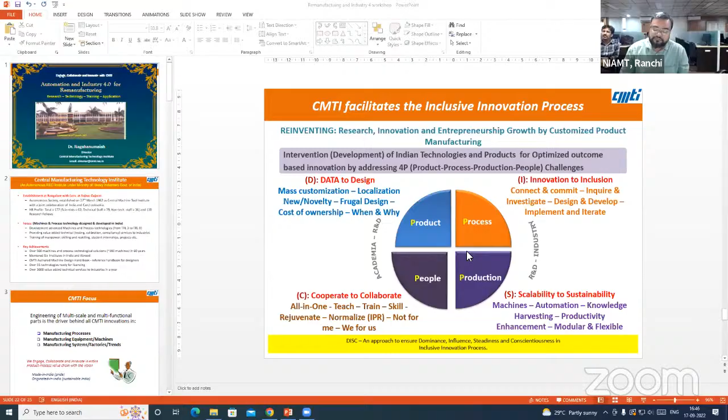Okay, one is related to augmented reality in intelligent manufacturing, asked before I think. So Rishabh Raj has asked: what is the impact of automation during innovative remanufacturing process in circular economy? This is a kind of generic question.

Actually, the definition of automation itself varies with the situation. For example, while defining Industry 4.0, some of the decisions your computers will take, that is also called automation. Say, for example, you have a component which is worn out. If you are computer savvy, you capture the data using image processing or scanners, build CAD data, and also use AI/ML based algorithms. I'll give you one example: for Tata Power, which makes solar panels, we recently supplied a solution to detect defects, identify them, and determine the quantum of damage to the solar panel. We do this for individual cells, and then define different algorithms that are evolving. Then you can suggest whether to repair it or scrap it. So that itself is an example of reconditioning.